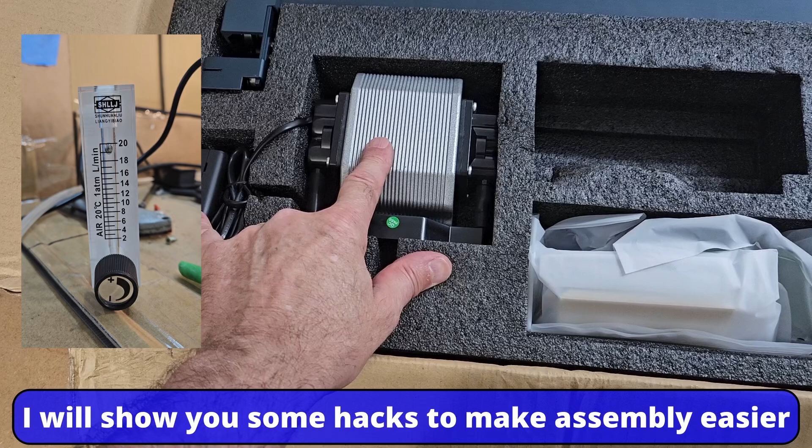Now, I don't have to tell you that it's very well packed, as you can see. I think this is EPE foam, someone correct me if I'm wrong, but I've only ever seen pictures of the B1. I know the pump is controlled by the control panel, and this is a 24 volt pump, so I will be doing some flow tests on that.

I don't know what this gadget is here, but something to control the 24 volt pump. That looks very similar to the Longer 240 volt pump, but please don't plug it into high voltage. It is plugged directly into the frame. So, got some instructions.

Declaration, I'd imagine that it is kosher, and an installation guide. So let's get all these parts out of the box and see exactly what we've got, and then we can see the best way to start assembling this new frame.

When you're unpacking, you do have two side rails. You take out the first one, then the second one's actually quite hidden because they put packing foam between them. So just pop it out, and that's the other side rail.

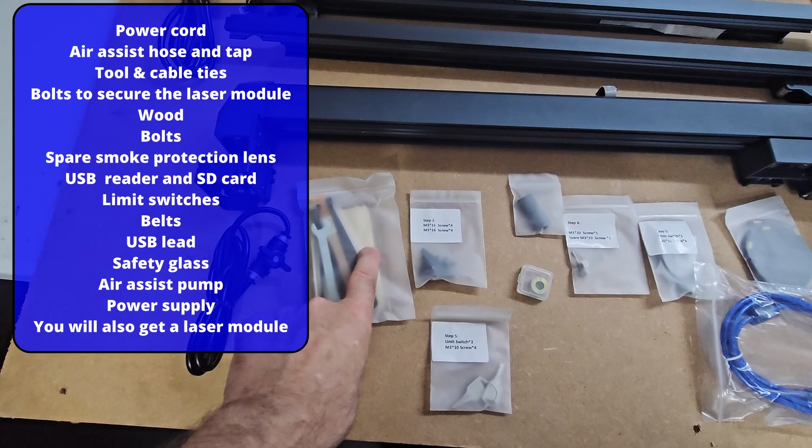So this is what you get in the box. You get a front and back frame, 2 side rails, the gantry, power cord, air assist hose, some tools and some pieces of wood, packets of screws for assembly, not sure what that is, limit switches, the belts, USB cord, glasses, and because it's a 30-watt kit, 24 volt 8 amp power brick.

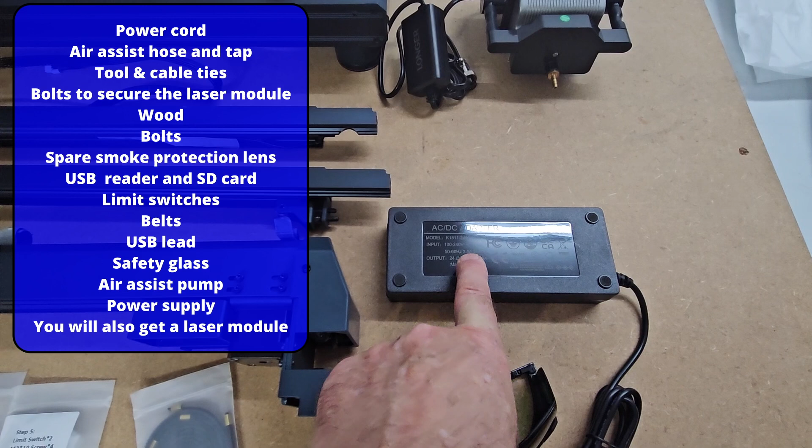Now they sent me the 30-watt module some months ago, and I have done a couple of videos on that, but I only used a 5 amp power supply because that's what I had that got delivered with the 20-watt module. I'm pretty sure on that, so I will revisit my power tests on the 30-watt module using this 8 amp, because I'm certain that when I was doing the tests you could hear the fan slowing down. Now I wouldn't expect the fan to slow down now it's got an 8 amp supply instead of 5 amp.

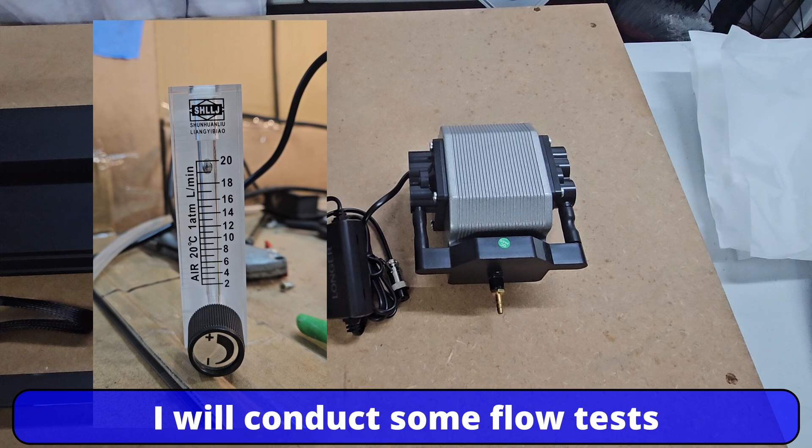And then you've got the 24 volt pump. So I'm going to do some investigations on that and see whether it needs adapting like I adapted my 240 volt one. Now let's have a look at what we've actually got.

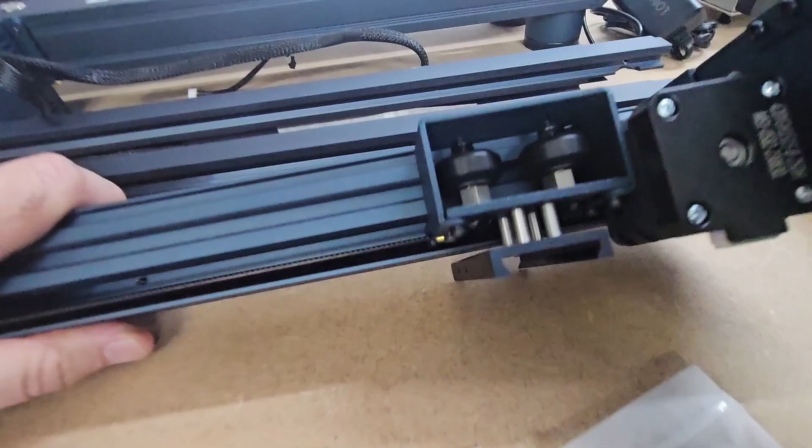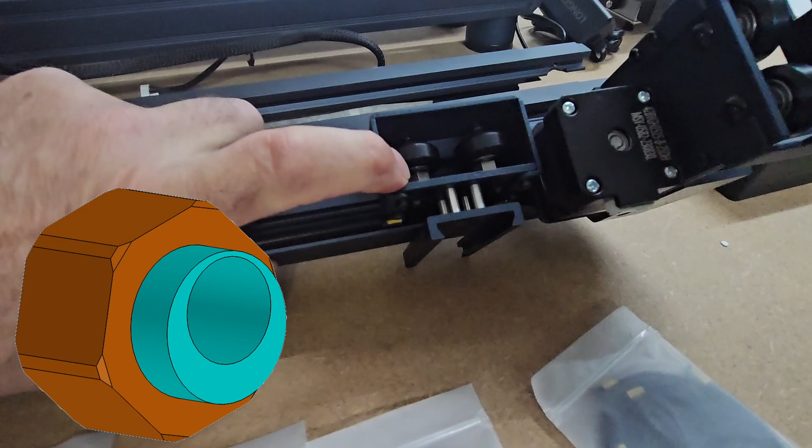So it looks like these profiles are custom made, so it's not something off the shelf, and unlike the Ray5, you get a 4-wheel carriage for the X, and yes, definitely in there you can see 4 wheels - 4 wheels rather than 3. So unfortunately you've got double the amount of eccentric nuts to adjust, but they're very easy to adjust.

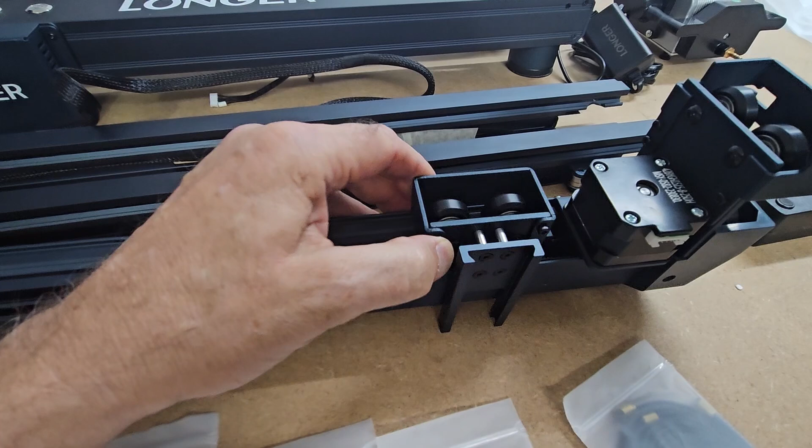Now, I have had this laser for a while. They delivered it before I went away, and now I'm back. But when I took it out the packet a month ago, as with all 3D printers or lasers that use these wheels, these 2 wheels were adjusted on the eccentric nuts. If you don't know what an eccentric nut is, don't worry, I will cover it later on in the video. They were adjusted quite hard, and that made the wheels have flat spots.

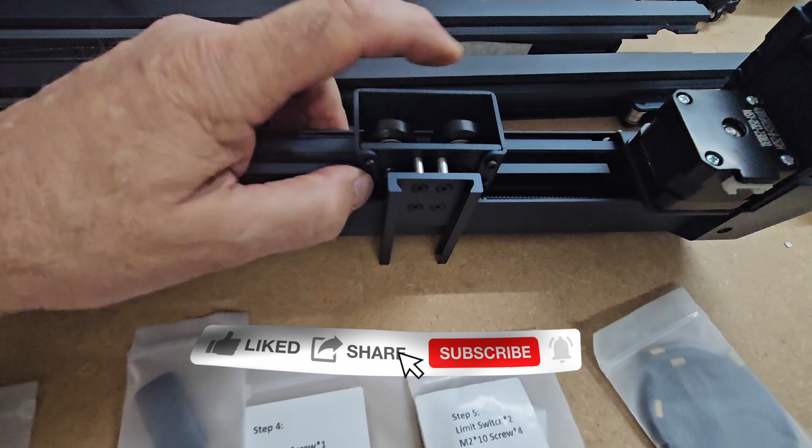So before I went away, I unadjusted the eccentric nuts, so now this can move freely - look, I can spin that. So when I adjust these now, I know they're not going to have flat spots. But other than that, yeah, I'm happy with this. This looks a much more solid piece of kit than the Ray 5.

The Ray 5, the more introductory laser, is 2020 profile. So although the profiles aren't bigger, they are different shape and they are taller, so they should be stiffer. Anyway, let's start reading the manual and see whether we can start assembling this.

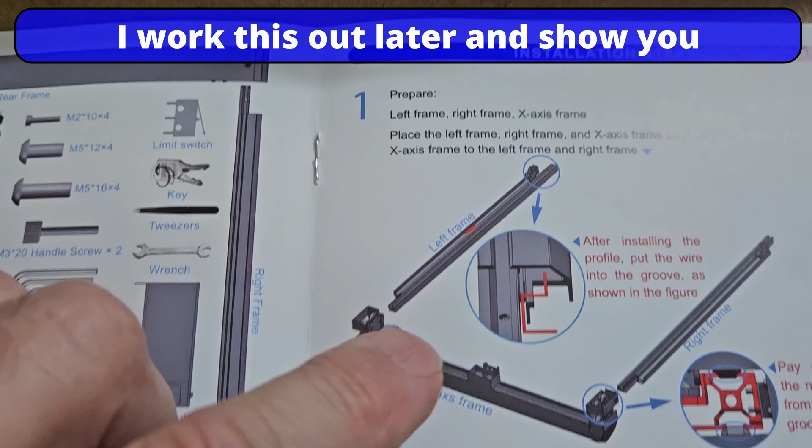Okay, having read the instructions, I'm not really sure what they're trying to tell me. Now, the left-hand frame is the one with all the cables on, so they're indicating in the manual this cutout here, and that's shown by the red rectangle just here. And this part here, I'm not really sure.

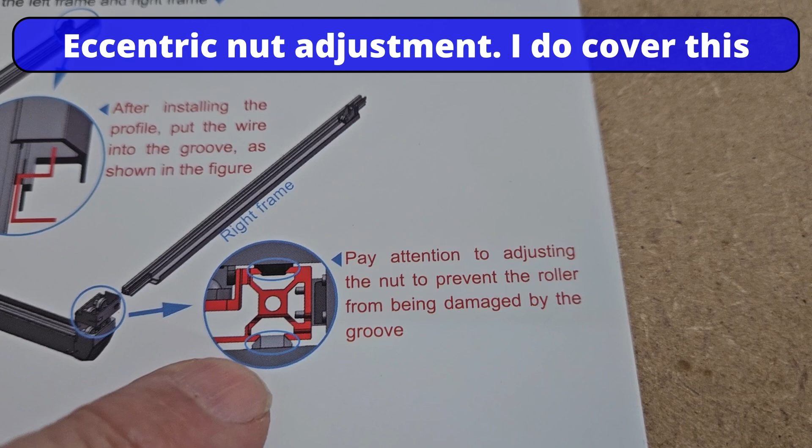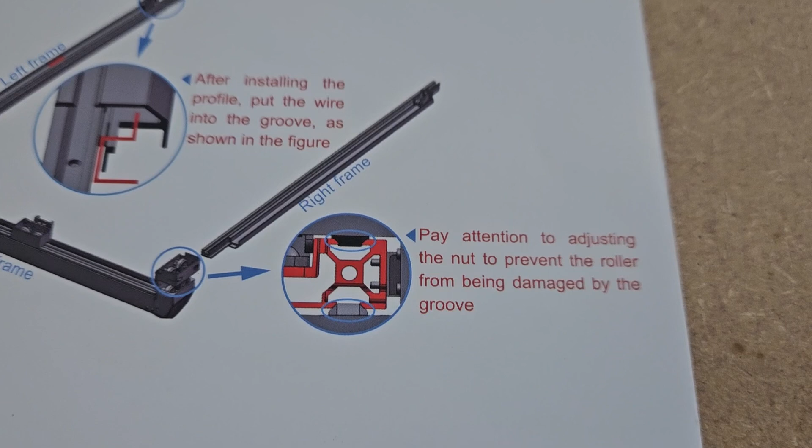After installing the profile, put the wire into the groove as shown in the figure. Then this one is pay attention to adjusting the nut. Now I assume they are talking about the eccentric nut to prevent the rollers from damage by the groove. Yeah, so they're talking about the eccentric nut. Now we'll get it all assembled first, and then we'll come back to checking the eccentric nuts.

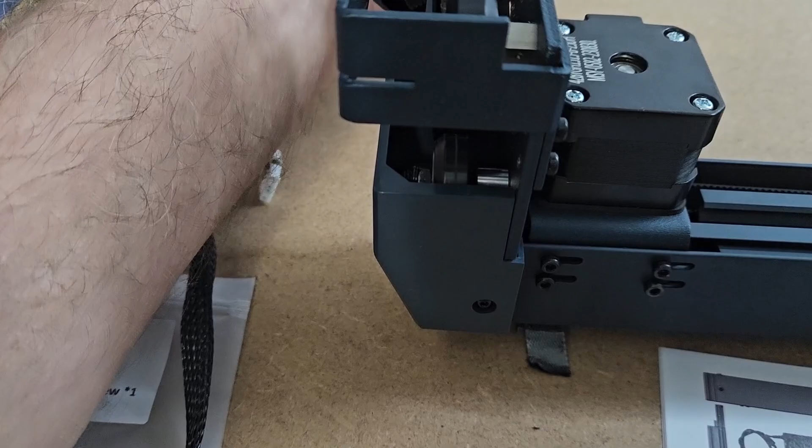But one would assume that this profile is going to go this way, so the cable in the channel, the groove there, and the roller top side. Now this should just slide in here, so that slides in nicely. So I'm going to put that about halfway, and then I'm going to do the other one, making sure that this roller is uppermost. And when you've got two hands available, it just slides in there very easy.

Now these wheels, they do slip round, so that means - well, that one does and that one doesn't.

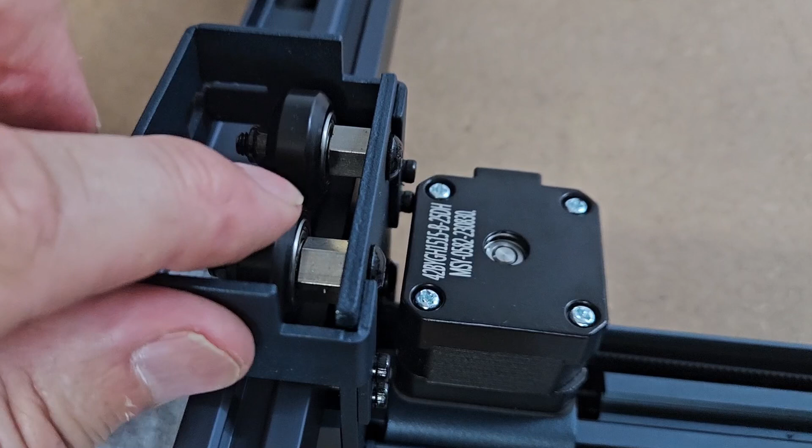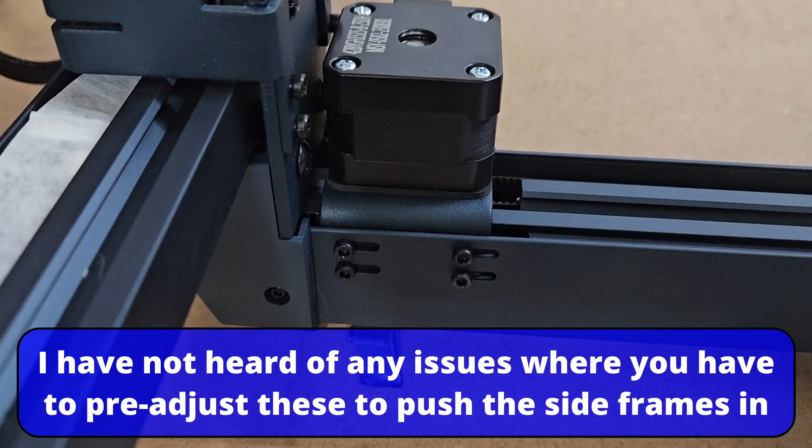You can see it pushes the profile, so they're going to need adjusting - these are the eccentric nuts. That one's probably okay, and that one's not doing anything, so we'll come back and adjust them. Should you have a problem pushing the profile in between the two wheels, you're going to have to loosen off the eccentric nuts.

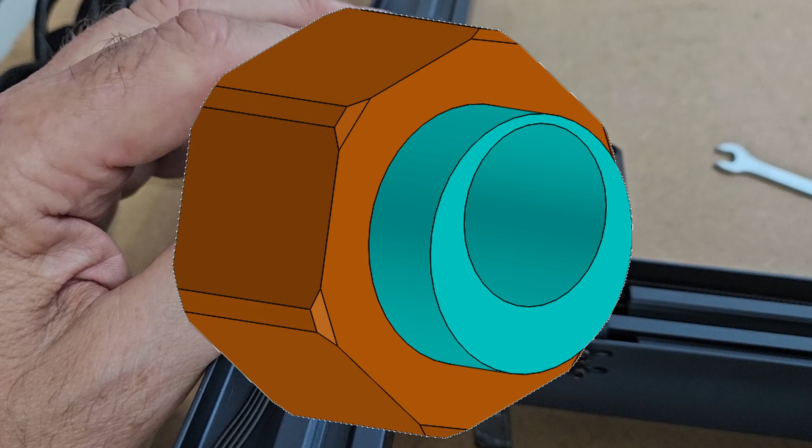Now the way you do that, they've probably provided you a spanner. So if you struggle getting the profiles in between the two wheels, you're going to have to adjust these eccentric nuts. I'll put an image on the screen of exactly what they are, and when you adjust them, it's either going to move the wheel closer to the profile or turn it away.

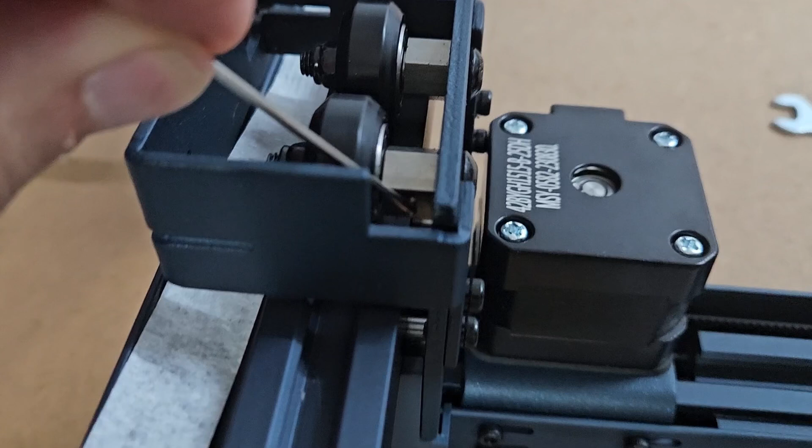Now I do notice just in here, you might not see it on the camera, but there is a little dot there. Now this one is gripping at the moment. I'm just going to see which way I need to turn it to make it looser.

So I turn the nut so the dot went closer towards the profile, and that's made it looser. That's really loose now, and that's really loose. So I'm going to leave them loose because we're going to adjust them once it's all assembled. Let's go on to the next stage.

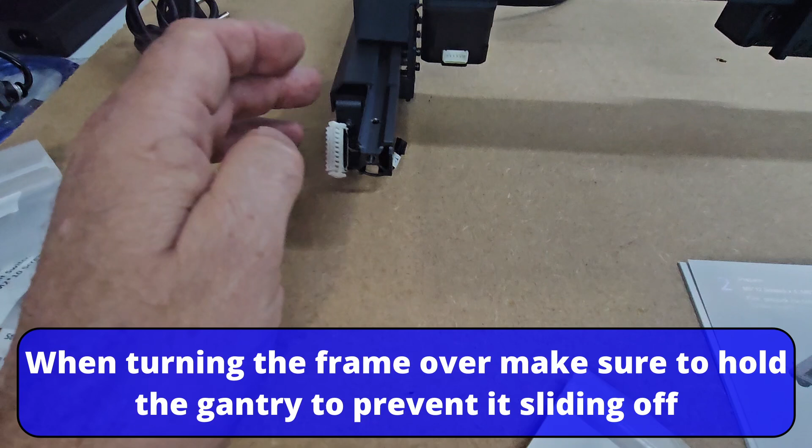Turn the frame over, and I've still got the wiring harness on the left hand side. So you've now got the stepper motor connection looking at you where the laser mounts. Now we're going to put the front on first, and you're going to have to be careful with this bunch of wires to make sure you don't trap it. We've got no wires this side, so let's get the front on and see how easy that is.

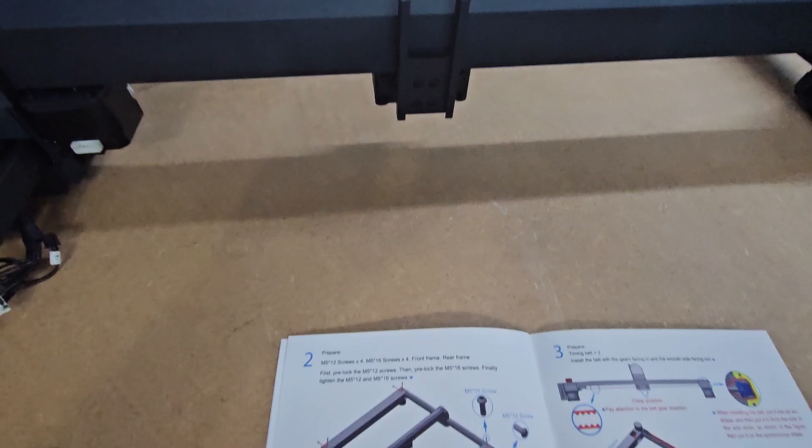It's telling you need packet number, step number 2. You need them screws. So it doesn't quite tell you in the instructions that when you're pushing the side profiles into the front frame, that this bigger section doesn't disappear into this cover.

This part here butts up to that, and if you look down this screw hole, you'll see the corresponding screw hole appear underneath that. So what I'm going to do is gently line that up again, and I can just see the screw hole down there. Going to get that more square, and I'm going to put a screw in.

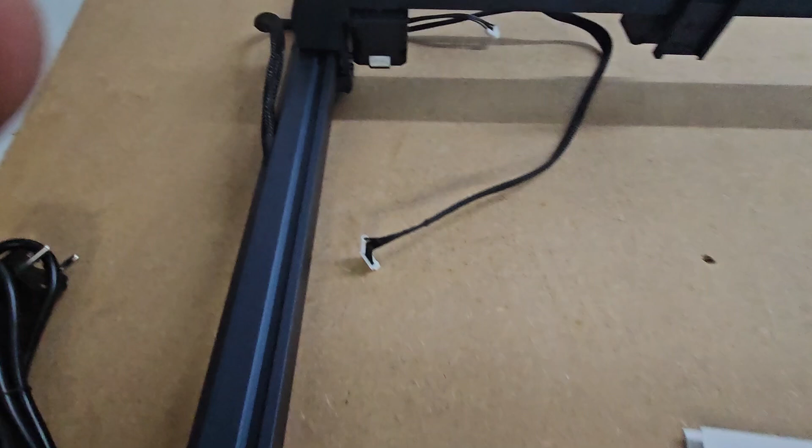So what I've done, I've pushed the gantry further away, and I've taken out this side at the moment, and I'm just concentrating on the left hand side. Just make sure that you get the front and the profile square with one another, then gently wind that in by hand. You can just see it's slightly proud.

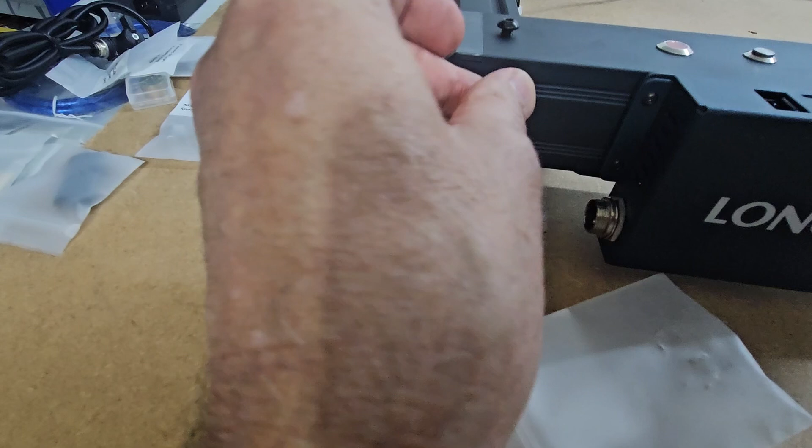And then in the front you need the shorter screws. So this is the longer screw, and in the front, yes, if I look in that hole, I can see the screw thread waiting for the screw. So I'm just going to try and turn that one in by hand, and I'm only going to do these up loosely at the moment.

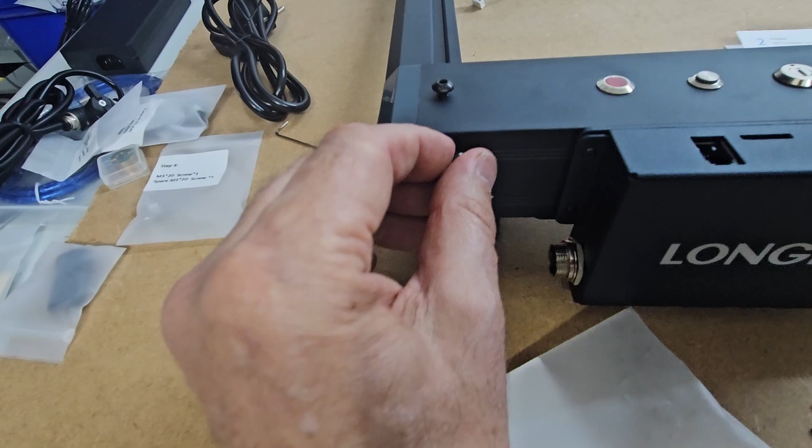I'm going to have to put the camera down because I'm actually right-handed. So what I had to do to get this screw in, I was holding the front frame here and my other fingers were on the side frame, and I just had to lift up the profile to get the screw holes to line up.

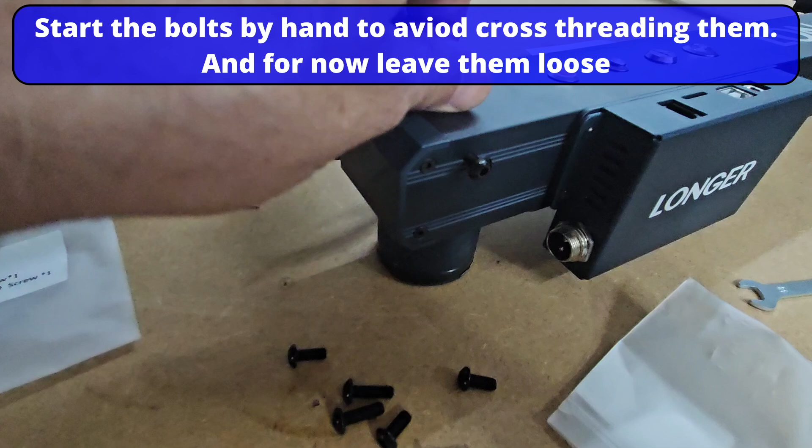And now I'm just going to nip those up very loosely with the Allen key. So what I did, I nipped both screws up just a little bit, and then I unwound it one turn, and that will hopefully just give me an extra bit of movement this side to get this one in.

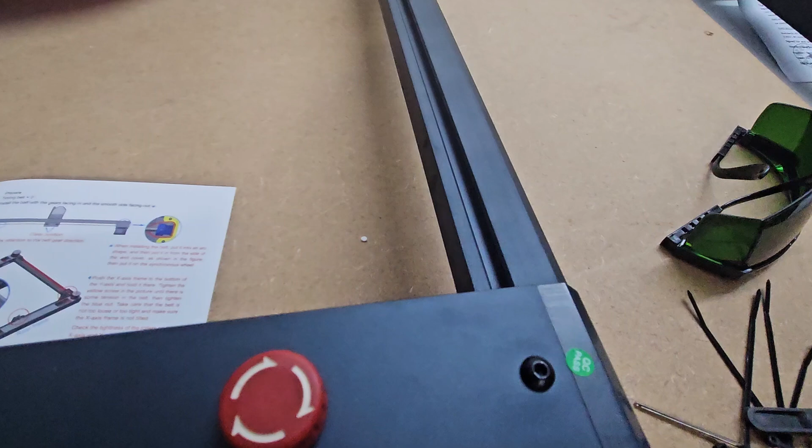Let's have a go at that one. So again, to get this screw in, all I had to do is lift up this profile slightly and take a bit of the weight off. You can just see I had to raise it up a little bit there to make sure the screw thread in the profile is square with the screw you're putting in.

Now again, to get the front screw in, I'm going to have to lift up the profile, and hopefully you can see the screw holes pop up. Now the screw holes popped up. Get that one in, do those up loosely.

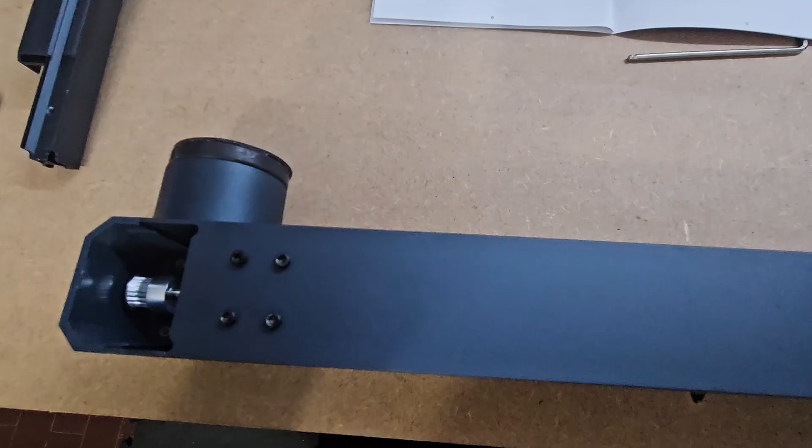So what I'm going to do now is pick the frame up and turn it around, but make sure you hold the gantry, otherwise it could roll off the other end, and that's the last thing you want to happen.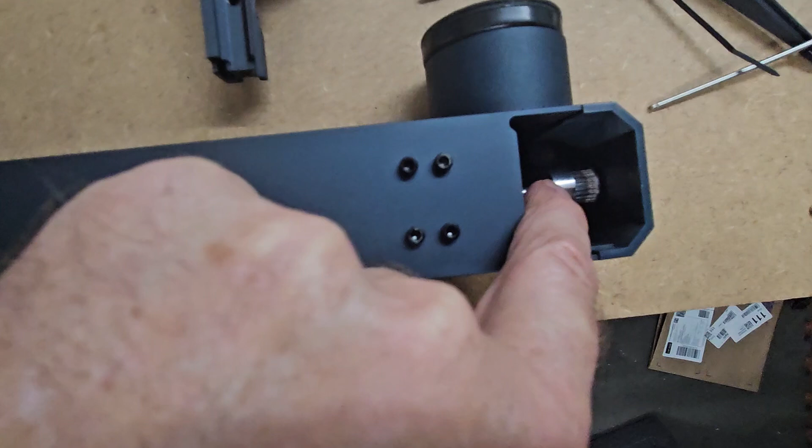So on the back edge of the frame, you've got a common crossbar with one pulley here and one pulley there. Shortly we're going to have to thread some belts around there, and it looks like, because of that big screw, these feet might be adjustable.

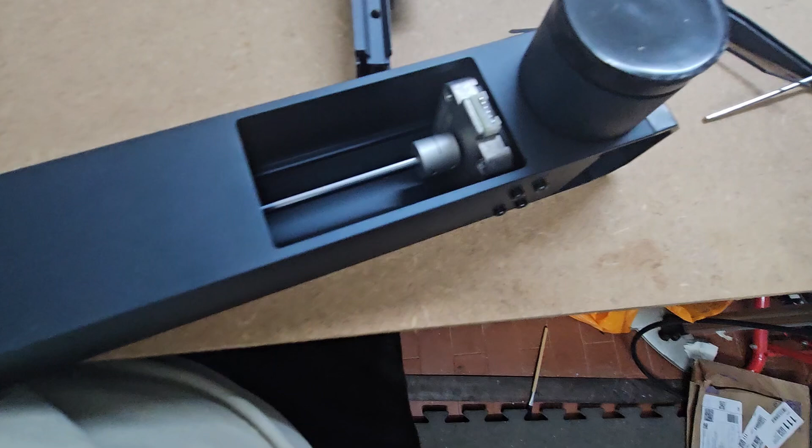Yes, they are. Look, how good's that? I like that. Let's take one out now and see. Oh look, there's a stepper motor there.

Hopefully you're working on a nice even bed and won't have to adjust those much. So there's a stepper motor there. Maybe this is what they were talking about. Let's have a look at that cable before we put that on now.

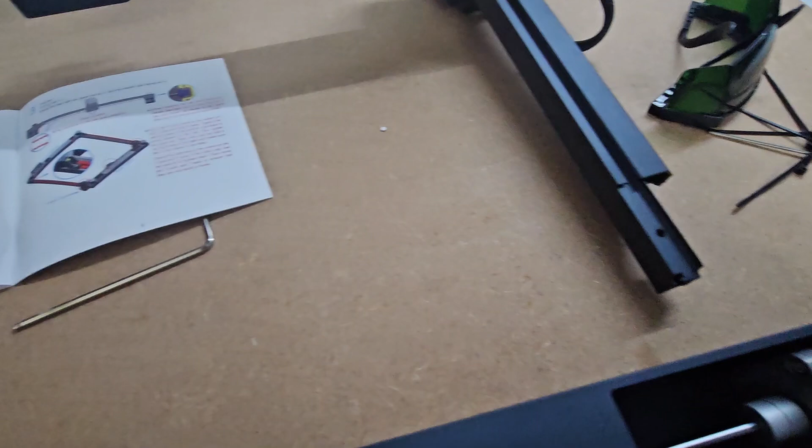Going back to this instruction, maybe that's what they were trying to tell us here, to take that wire. Because I'm really unsure where this cable goes, I'm just going to take this side cover off. Now, to get the bolts off, they were particularly tight.

So you use the flat end of the Allen key, put it in there, and apply pressure like this, backwards and forwards, and in the end it allowed the bolts to release because they were nipped up very, very tight. Let me get that off and see where this stepper motor cable goes, because it's unclear in the instructions.

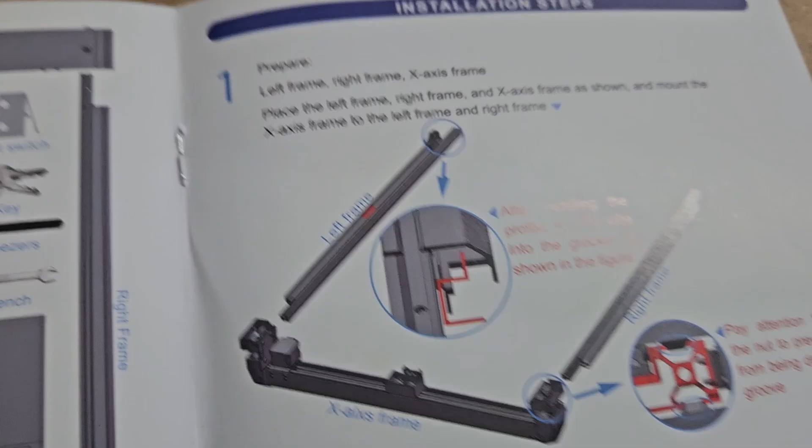Right, so that's made it a lot easier. Going back to this step, it's clear now what you have to do, that this stepper cable has to go in this groove. That's what they're telling you. So let me slide that in there.

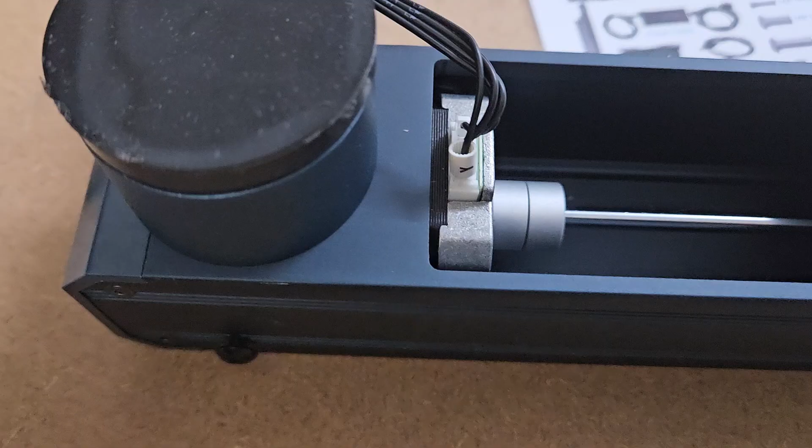What I'm going to try and do is get the short front screw in, then I can flip the frame over and do the top screws. There you go, front screw just nipped in, about 4 threads to do up. Put the stepper motor cable in, let's flip the frame over.

So I've turned the machine back upright. It's sitting on a flat piece of MDF. I've done all the front screws up first, and then the top screws. No need to do them up mega tight. You are putting steel screws into aluminium frames, so they just have to be snug. They're not going to go anywhere.

Okay, looks like belts are next. This is the only tricky bit, that now you've got to feed the belt in there and loop it to the right hand side of that gear. You can see there is a gap between the gear and the frame, and that's what they're trying to show you in this stage.

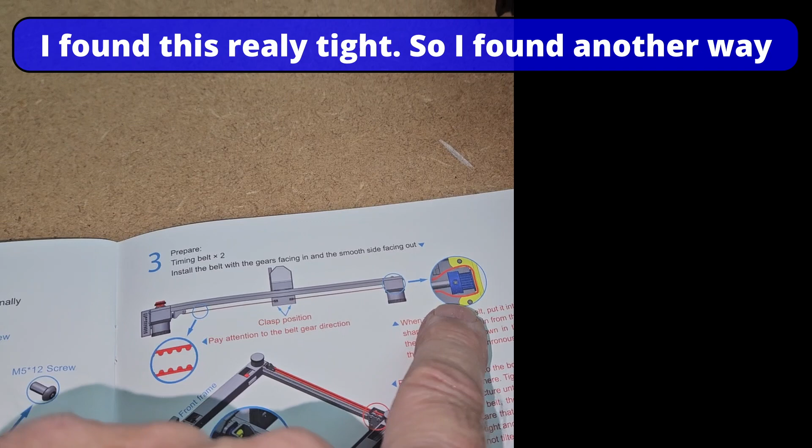And they do supply, I believe, plastic pliers, pinchers, to allow you to do that. So let's have a go at that. Okay, I've done the stepper motor side belt, and I did struggle with that, so I'm going to show you how I overcame that problem. But this one I had no problem with.

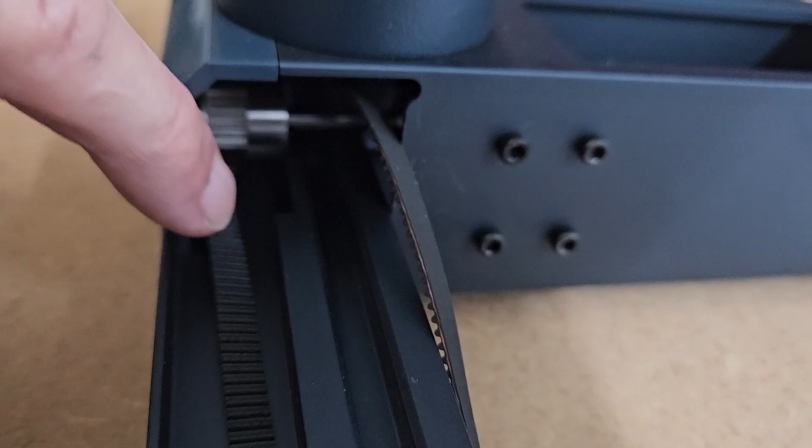I think the gap between the end of that silver gear and this casing is a fraction wider, because that belt just slipped through. On the other side, the belt teeth were being trapped by the gear. So this is what I did, I removed the end casing.

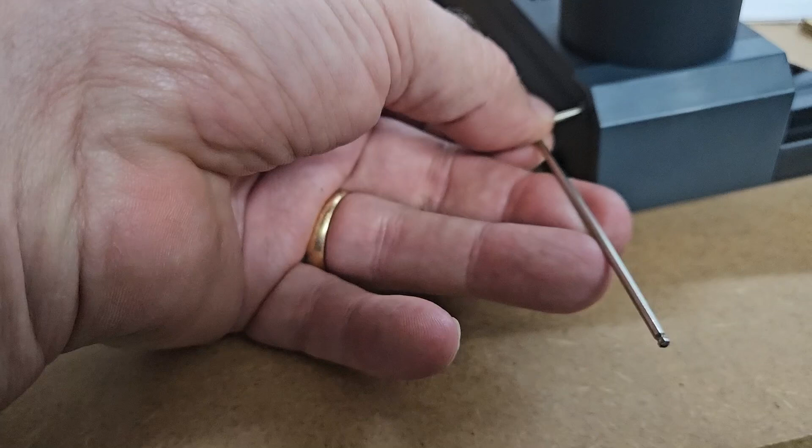So the nuts and bolts are quite tight. I put my Allen key in, and very gently, I'm just lifting up and down, trying to crack the threads because they are quite tight, and pushing in that direction as well. There you go, that one's done. Number 2.

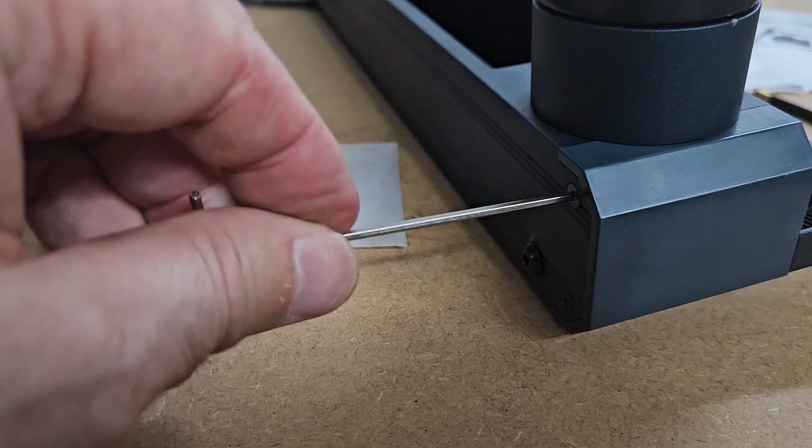Again, pushing forwards and, in my case here, backwards. That's gone. So now I can use the round end to remove the nuts. If you get really frustrated trying to get the belt around one side, especially the opposite side to what I'm doing now, the side that the stepper motor is, this is the way around it, because this is the only tricky part on this build, I think. Other than that, it's been really simple.

So with that off, it exposes the whole cog, so you've got no problem getting the belt around. Let me just wire that up.

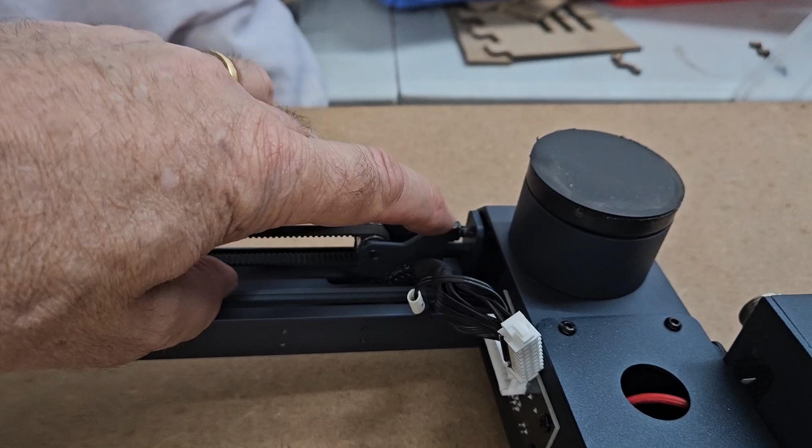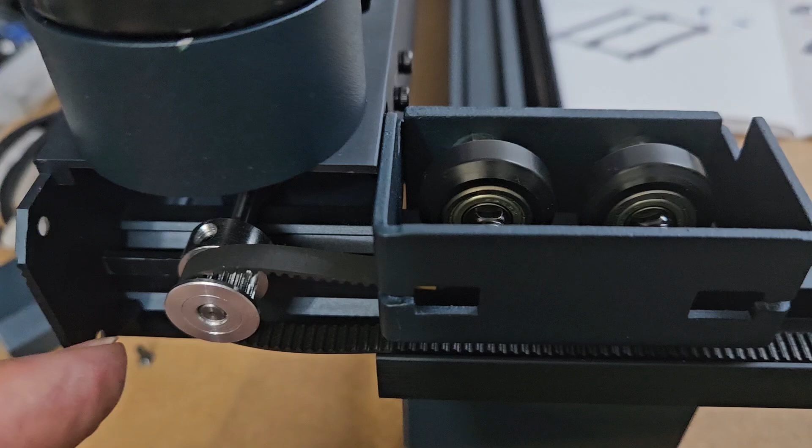Because I've sort of tensioned this side up already, making sure to do the lock nut up. Now they say in the instructions, push the gantry all the way to the back. I've disconnected the stepper wire and pushed it inside the housing at the moment to allow the gantry bracket here to touch this section here, because you need to do the same this side. What you need to do is make sure that when you're putting this belt on, it is nice and tight and the teeth of the belt are engaged in the teeth of the gear.

Now that looks good to me. I don't think I can pull that any tighter and go one tooth, because I've only got one tooth of resolution. If I went back one tooth, you would see, look, you can see it's come up. So it does sort of sit there nicely. You don't have to pull hard.

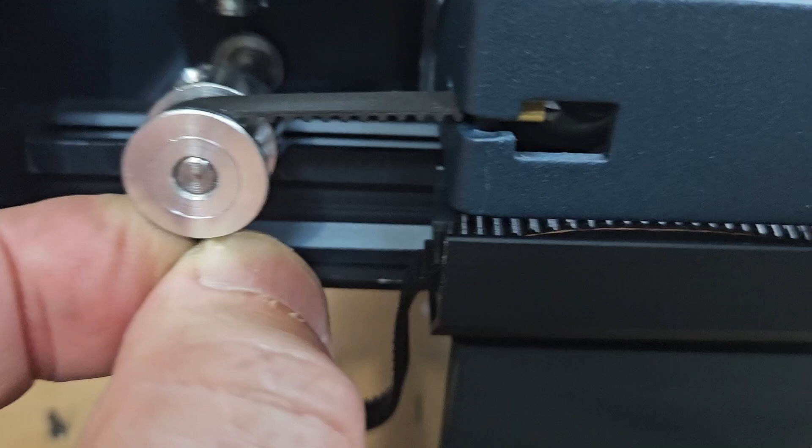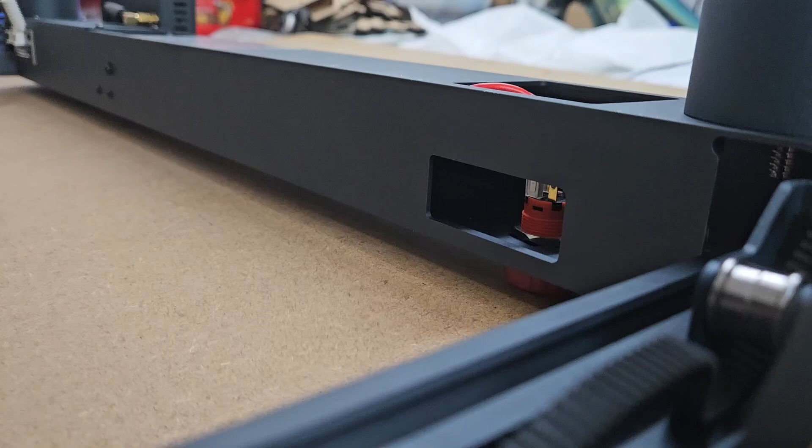So making sure that's correct there, then thread the belt into, well, you've already threaded it here underneath the gantry around the pulley. Now you need to get the other end back in here, and you'll probably find that you have to loosen this nut. So what I'm going to do, I'm going to back that off now, make it longer. Otherwise you'll never get the brass section of the belt in. So just make that a bit longer.

Now making sure that that is tight. I'm going to have to put the camera down to do this. Making sure that this is now loose, you can see, because I can press that. So that's one tooth wrong. So if I just pull that in there, and that's engaged on the teeth, going to hold that there, going to wrap it around there, and then get the brass bit in there.

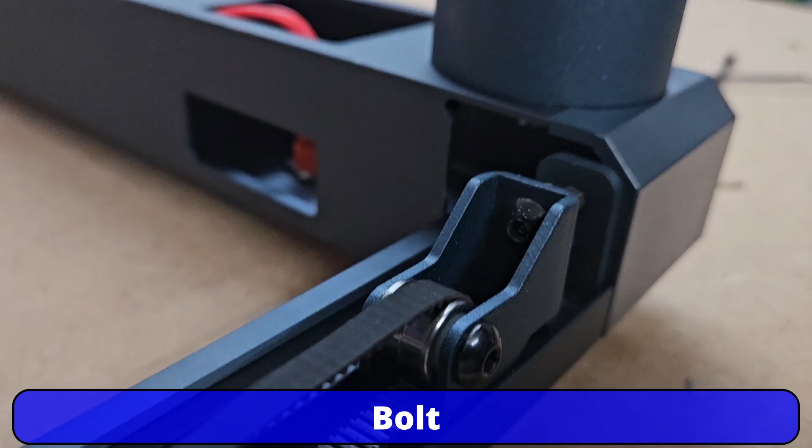Now making sure that you don't lose that one tooth of resolution. I'm going to keep holding that, and then I'm going to adjust that screw there. So I'm going to wind that screw back in, and that will make the belt tighter again. So as you get a little bit of tension on this belt, you can see this is too loose at the moment. You can let go of this because you've got the resolution on there. You can hear that pinging there, and this is too soft.

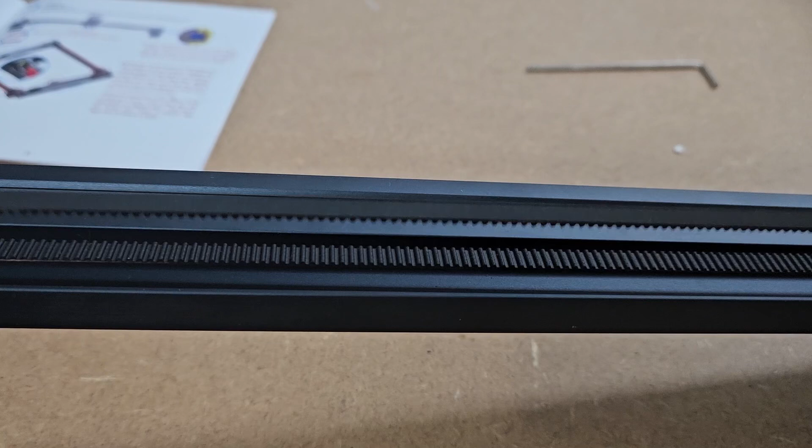So if I look at this side, that's a little bit too soft as well. So I'm going to have to do both sides to get that pretty much even. So once you've adjusted that screw and the belt is... it's subjective in a way how tight these are, but I'm going to come up with some test or some measurement gauge to tell you what distance you should have, or I'm going to come up with something. So they need to be equal. I think they're pretty equal.

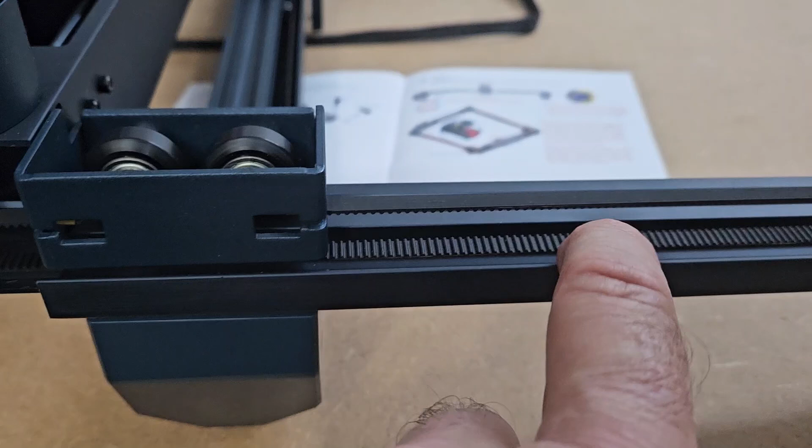The gantry is still here. The gantry is still there. All I've got to do now is do this lock nut up by holding the Allen head and then using the spanner to wind this nut up, come into my left to lock on the plate there. And I think it goes without saying that the teeth wrap around the cog, and the teeth of the belt then face one another all the way around, and the teeth wrap around the idler. So that's it. I'm just going to put this cover back on and see what the next stage is, but we're almost there.

While we've got the machine upside down, it's time to adjust the eccentric nuts. Now I'll link a video, I'll show you a card now, and there'll be a link in the description that explains exactly what an eccentric nut is and how to adjust them properly.

If you adjust them too tight, you'll generate a flat spot on your wheels. If you leave your laser overnight and these nuts here are adjusted too tight, what you're doing is squeezing the wheels down onto the V groove of the profile. And when the laser is at rest for a 12-hour period or 8 hours, it will generate a flat spot. Now the flat spots, you can make them disappear by adjusting the nuts correctly, then slowly working the gantry backwards and forwards.

Point to note, if you're new to lasering, yes, these are stepper motors, and at the moment it's not plugged in, so it's not going to work. But when you move the gantry backwards and forwards, this shaft will spin and this motor will generate voltage. And if the leads on the stepper motor are plugged in, that voltage is sent back into the control panel.

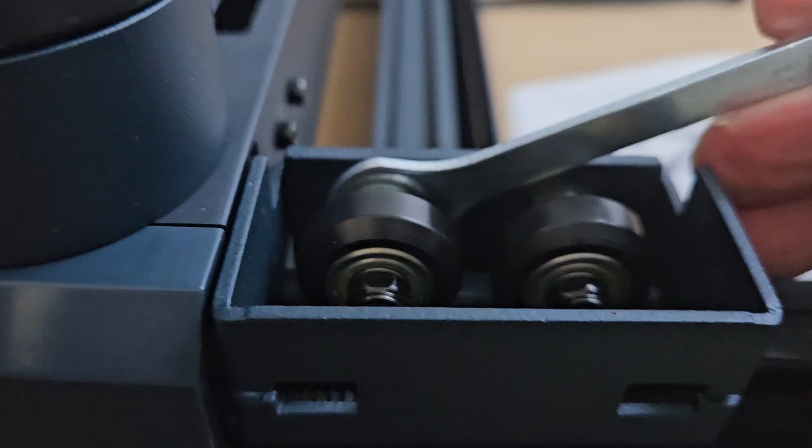So all I'm going to do is put the spanner on there, and very slightly - you can see how much I'm going to move - that much. If you missed it, yeah, I didn't move it much. Then I'm going to go back, and if you look very close, you can actually see the bearing turning. So I'm going to do a little bit more.

Again, you're going to watch it - that much, yeah, not a lot again. So I might be moving that the wrong way, so I'm going to go a bit bigger this time. Yeah, so I was going the wrong way because that's now really, really spinning.

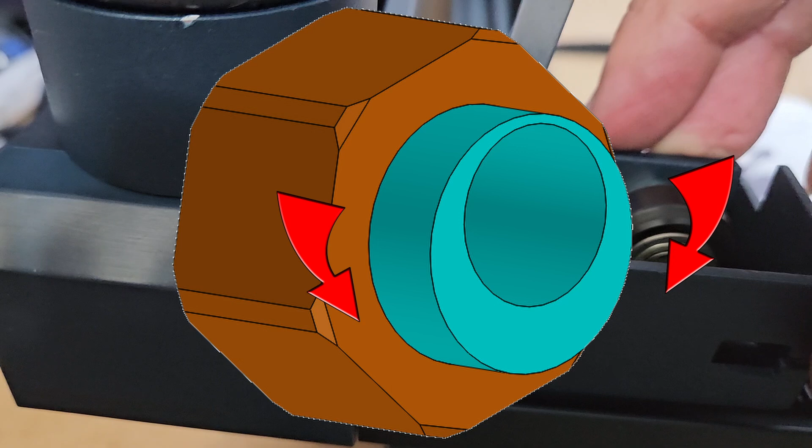So I'm going to do it slowly, come back down to me. Now I didn't know which way to do it because the eccentric nuts have two ways you can turn them. So that now, my finger is slipping on the wheel now, so I'm going to go back upwards a little touch, a little bit more up, so I'm taking the pressure off.

That's just slipping. Now this one is not slipping, so this one needs to go up, doesn't it, to take it off? No. No, it wants to go down, sorry. You can see there, look, it's moving the gantry.

It moves both sides because the gantries are joined now. So that's too loose now, because you can see the wheel, my finger is not slipping on the wheel, it's slipping on the profile. So I'm just going up a little bit. That's good, so that's just gripping, and if you look here, it's just trying to pull the gantry. So that's that side done.

I'm going to do the same for the other side. Now that is really easy to turn, so I need to go the other way. A little bit more, going up just a touch. That's good. That one's really loose.

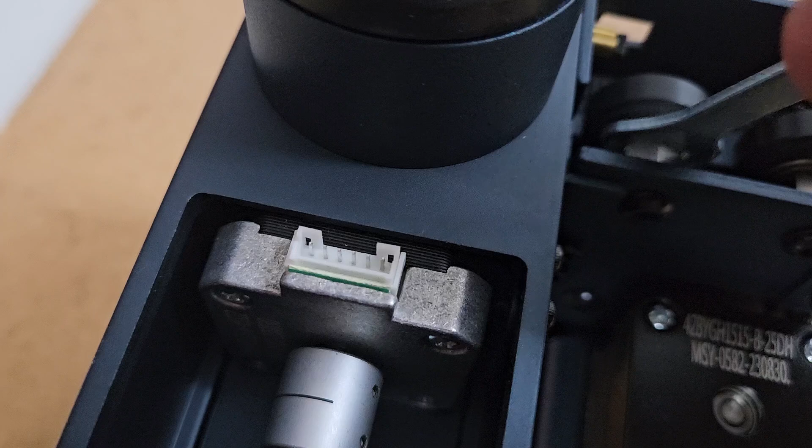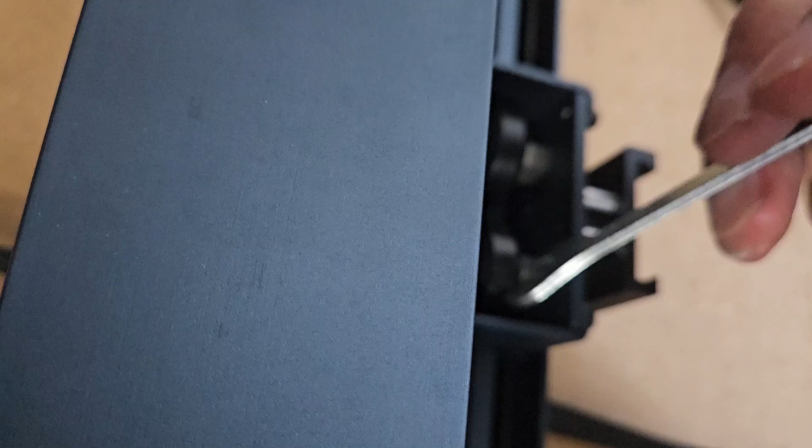Really loose. Really loose. Tight there, so come back down. That's good. Now the same for the gantry here. That one's tight, so I don't know which way I'm turning, so I'm just going to turn it a little bit. That's probably made it looser.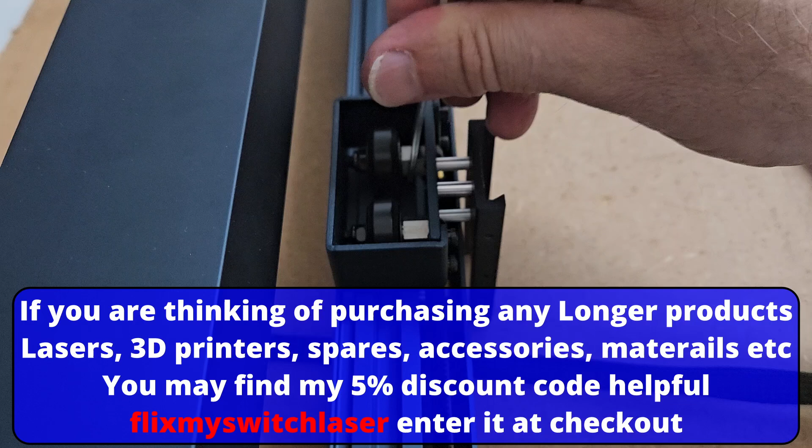Yeah, so I'm going to come towards me now, just a fraction. That's good enough. I'm going to come towards me just a fraction. Needs to go away.

And this is an important stage. I know you're all eager to get it turned over and get the laser module on, but like anything, setup is crucial. Right, so that's fine.

So now I'm going to turn the laser over. Now we've got no stepper motors plugged in at the moment, so I'm just going to test. Right, why is that getting stuck there?

Probably because that's touching, yeah. So that doesn't come all the way forward because you're going to have a big diode laser there. So the reason it gets stuck is because it's hitting the adjusters here.

So you can see, and having some noise and feeling a slight sort of notching motion is the way the stepper motors work. So don't worry about that. What you don't want to do is from rest, if you push the gantry one way or the other about

50 millimeters, or 2 inches for my American friends, then if you feel a bump, that means you've got flat spots on your wheels, because it takes about 50 mil of travel for the wheel to rotate and the flat spot, which is actually sitting on the V groove now, to rotate, and then you feel it again. So I've got no flat spots there. And I've got no flat spots there.

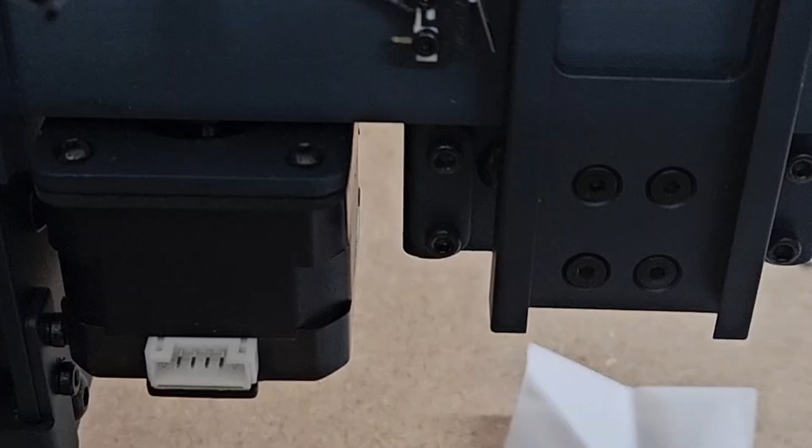Again, you can see how quickly I'm moving it, but once your laser is plugged in, you can only move it this fast. It's hard to move it slow with no laser on there. But you need to move it thinking to yourself, boy, this is slow, because that is enough. If you move it and you see inside the fan of the module a light come on, you're moving it too fast. You must go slower.

That's all right when you're moving the laser, but when you're moving the gantry, you've got no way of seeing what you're doing. You've got no way of seeing the back voltage. And this isn't a moan at Longer. It's a thing with motors in general. So whether it's a laser, 3D printer, CNC machine, or whatever, if you move these too fast, they are little generators. Right, so I think I've waffled on a bit more.

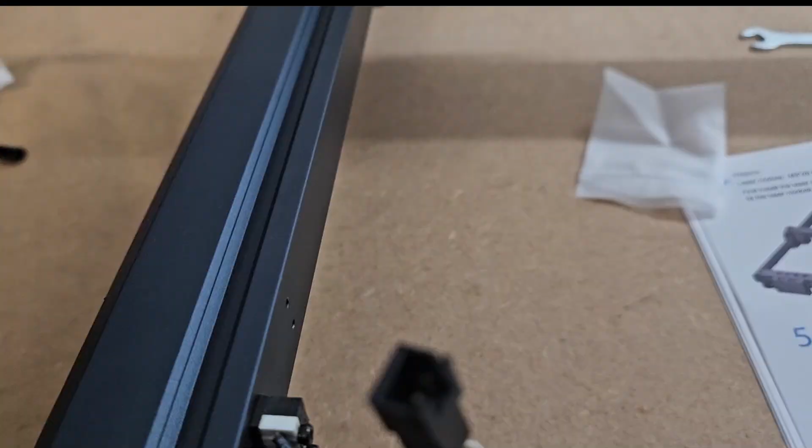Let's see what's next. Limit switch is probably next. So not going to insult your intelligence. The laser limit switch, this one goes with the opened end downwards, and so does that one go downwards. Not that it makes much difference, but now you just make sure that when you're moving the carriage, if you listen, I'll move the camera closer, you can hear it clicking, and move the gantry here. And that's it, that's installed.

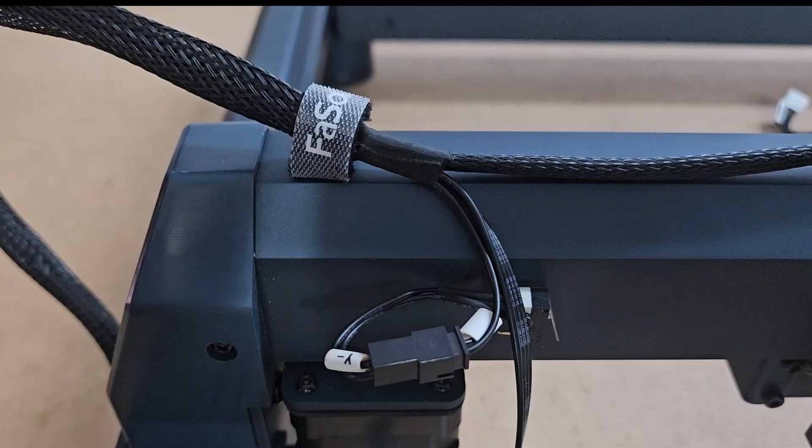So now we've got the wiring to do. You've got this one down here, so you've got a black edge there and a black edge on the mark there. So you're just going to move that round gently, square it up, and push it in, and it locks. And then I'm going to use 2 hands with this one, probably going to tuck that down out of the way, and then plug that in there. And that'll only go in one way because there's a key.

You can see those 2 arrows. It's like a key, so it only fits in one way. If I bring this back up again, you can see the key goes in the opened end here. So I'm going to just do that. So then you just feed your wires around. Again, the little arrow marks, which you can just see here, one there and one there, they go uppermost, and I've already explained about that one. The arrows go to the open.

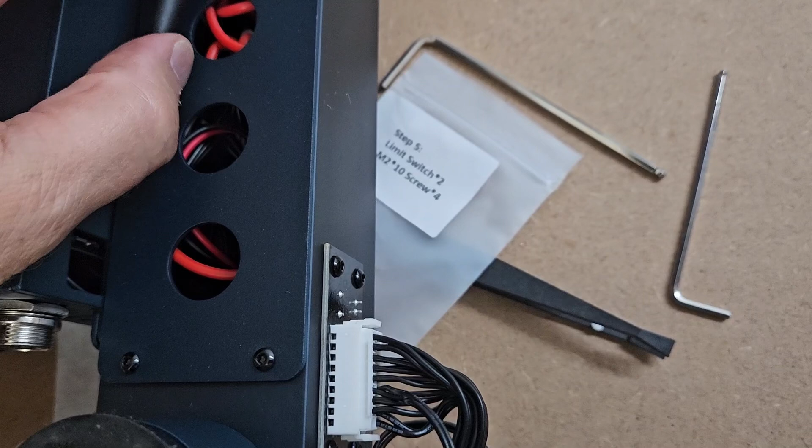This then is ready to plug into the laser, and I've got to do the limit switch at the back somewhere, or the stepper motor at the back now. So remember, I tucked this inside when we were squaring up the gantry, so just ease it out, and it only goes in one way. Let's have a look. So the arrows are going to go away from me, so the arrows should be on the back. Yeah, you can see the arrows, so that's just going to go around there. Press it in.

If you ever have to remove these, do not be tempted to pull by the wires. You will pull one of the wires out. What you need to do is get a nail under this side and under this side, and then wiggle it and then pull it out. Don't be tempted to pull the wires, otherwise you're going to be very disappointed. And that's, again, nothing to do with Longer. That's just wire management in general. Always pull from the plug, never pull on the wires.

So looking on the bottom of the laser, we've got an antenna here, which is going to give you your Wi-Fi signal. In here, we've got the accelerometer, which will detect whether the laser has been bumped, angled, or lifted while the laser is running. If it does, it will turn the laser off. And then this little fella down here is an infrared sensor, and this is a potentiometer, which you can adjust the sensitivity of. And this is a fire sensor. So if it detects fire, it will stop your laser from working.

So I think we're there. That seems good. That seems good. On off switch there.

Not sure what's on the SD card yet, I'll nip upstairs and we'll look and see what's on there. You can load your G-code files on here then put it in there, or no doubt this will have a wireless interface. If you put a file on the TF card and put it in there, I'm not sure how you'll burn it unless you just use the Wi-Fi page, then you can select the file and burn it. But we'll cover that in another video.

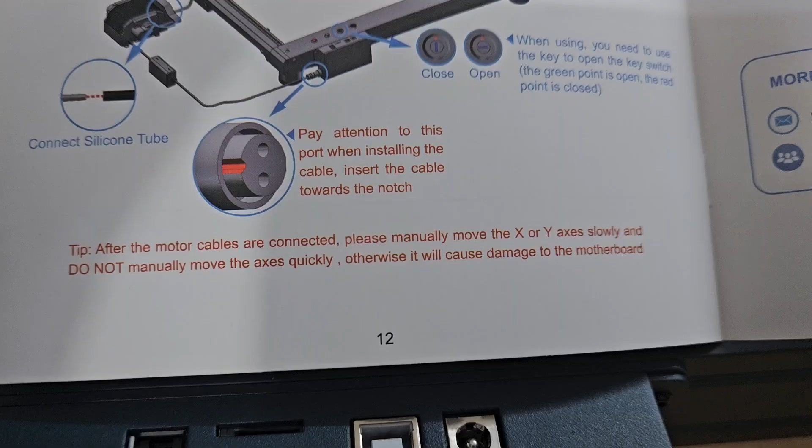This is the printer cable to go to your laptop if you're running Lightburn or Laser GRBL, and this is the power supply. You've got an on-off switch, and a switch that you need to have the key in to turn it on.

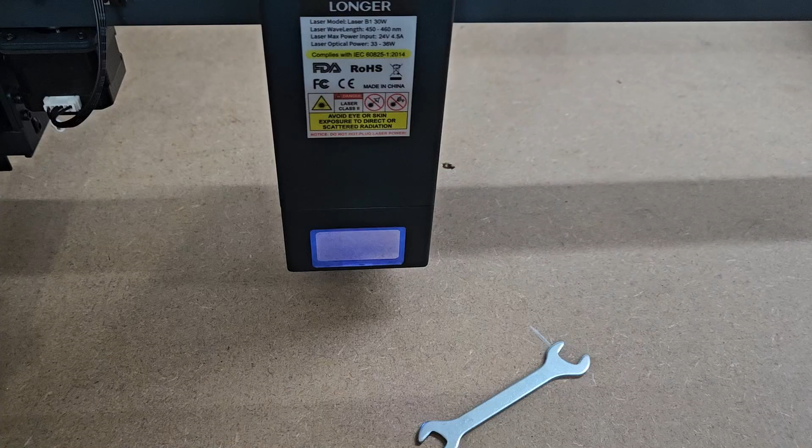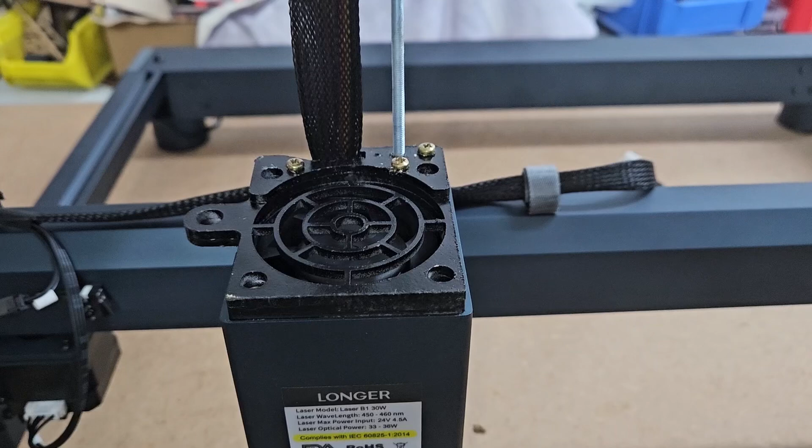What's that one for? That's probably... well, I don't know. Where's the book? Most importantly, if you plug in and you've got no power, this is an emergency button. You can see if you twist it, it pops up. Did you see that? Now it's down. Twist it in the orientation of the arrows, so that's clockwise, and it will pop up. See, it's up now. So that's now saying let power into the laser.

Here's the warning about moving the gantries quickly. If you do, you'll damage the motherboard. So please don't move it fast.

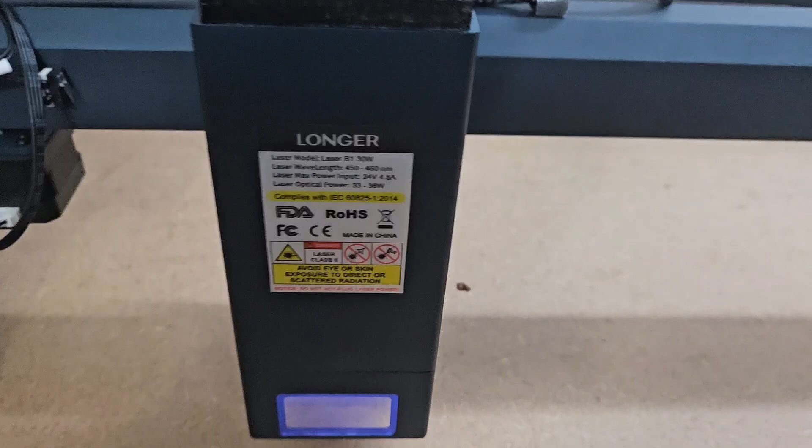So there we are, there's the module installed. Don't worry about this, this is an extra I've done for my 20 watts, I put it on the 30 watt. It just makes the fan a lot quieter and improves cooling. And this is just an extension of the cable, because I've been using this module on my Ray 5, and this is my fine focus system that I've developed for the Ray 5. I will try and adapt it to the B1. Now that I have a B1 frame, I can get on and try and do that.

I'm very happy to report that the Longer B1 frame has assembled perfectly square. So those of you that saw my Ray 5 video with the tin foil, we got no need for tin foil. We got a professional laser here, and it is perfectly square. Well done, Longer, very happy to see that.

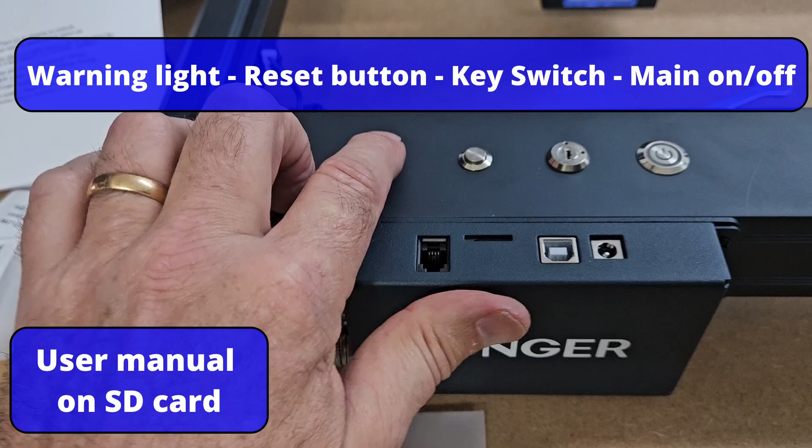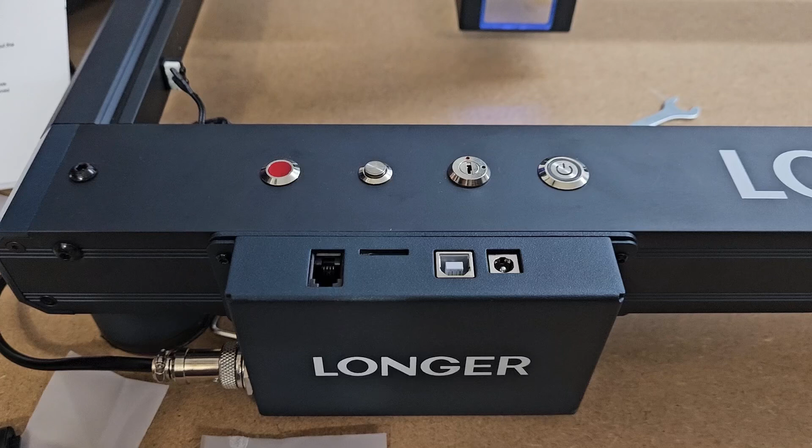When you're doing up the screws here, there's no need to do them up super tight. You've got two, and you should always use two, and it just grips the laser to allow it to stop falling. Then to focus, you've got a little kickstand, as it tells you in the book. Push it down, drop it down onto your workpiece, do the screws up, pop it back up, and that's it, job done.

So in the next video, we will turn it on and get it running and cut something and do some tests, and that will be the second of many videos. So this is just a build video, I hope it's helped you. I will turn it on and find out what this red light is for.

Maybe it's an alarm button, if it goes into alarm it'll come on. But until I get it powered up, what I need to do is move my Ray 5 out of the way and install this. Anyway, that's Andy as ever, wishing you a great afternoon, continue to make some happy smoke.